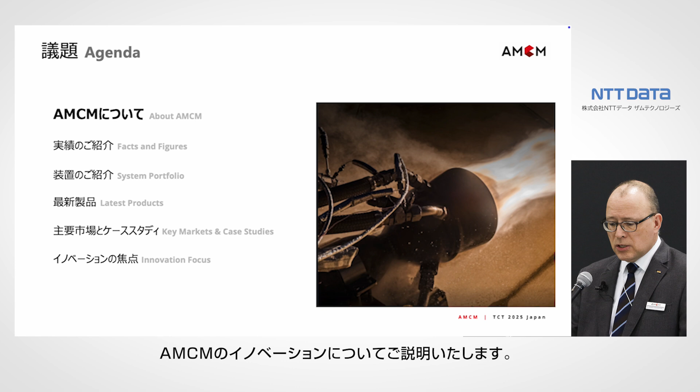So my agenda: I will tell a bit about AMCM, some facts and figures, and about our system portfolio. Most relevant, I think, the latest products. Also our markets and some case studies, which are also on display here at the show, and our innovation focus.

So where we are, AMCM is part of EOS Group. We are an independent sister company, 100% owned by the Langer family.

Our team came from, let's say, different companies. About 50% of the team worked at Rofin-Baasel for many years, so they are laser and scanner specialists and have a background in automation. The other 50% are from EOS, so they have additive DNA, like me. We have some colleagues who also developed at EOS, for example the EOS M400, EOS M100. So we have R&D colleagues in our team with a lot of experience.

How was the history? Maybe I start even earlier. In 2016, there was a trade show and Dr. Hans Langer asked Martin Bullemer, our today's boss, who worked for EOS at that time, when do we make the machines which EOS doesn't produce? Because they're too exotic and don't fit into the series portfolio. Martin said, I have an idea, because he also worked for this laser company and had a network, and founded a startup.

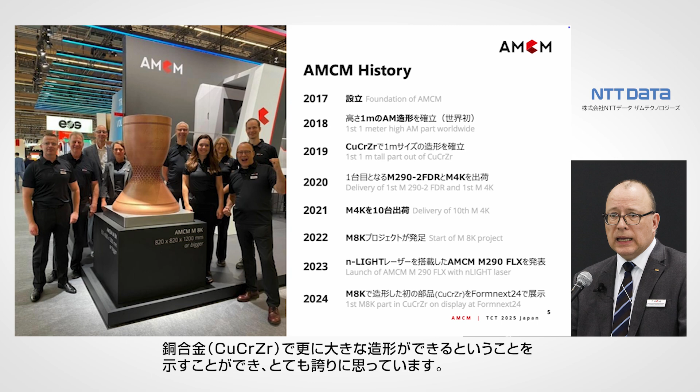And so it was constantly growing. A year later, there were already 10 M4K installed. In 2022, we got funding for an even bigger machine, the M8K. In 2023, we had our first nLIGHT system at start for beam shaping. And last year, 2024, we had the first part on display at Formnext, and we were very proud, the part is over there on our booth, that we could demonstrate that bigger additive manufacturing parts in copper chrome zirconium are also possible.

A bit about facts and figures: meanwhile we have 136 machines installed worldwide. So you see a bit of a split - biggest is North America, but Europe is also quite a good market, and 22 in Asia and 3 in Australia. All these 136 machines would not exist if Hans Langer hadn't given us the chance to make a startup.

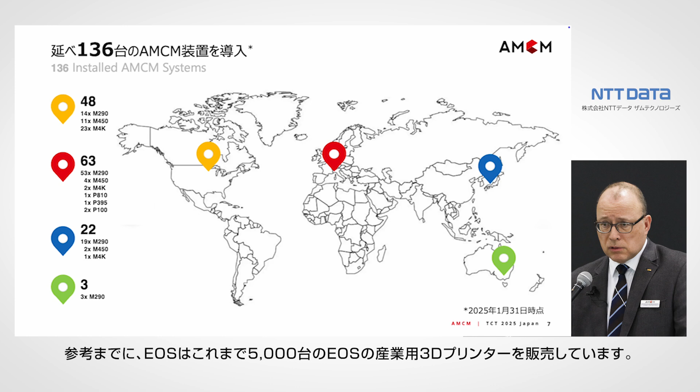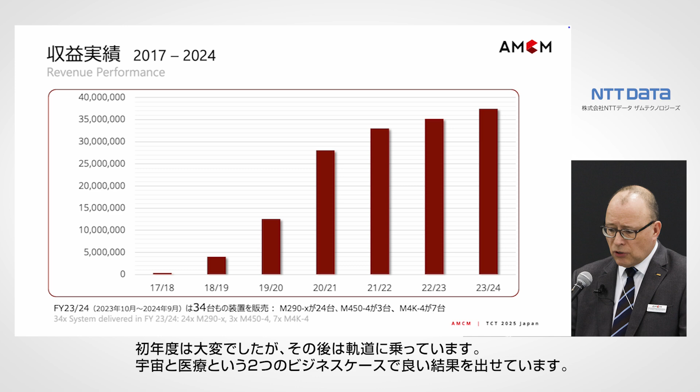Just to have a ratio, EOS has sold 5,000 additive industrial printers so far. The first year was hard, and from that point on we had a good story. So based on these 2 business cases, which were space and medical, we could make good numbers.

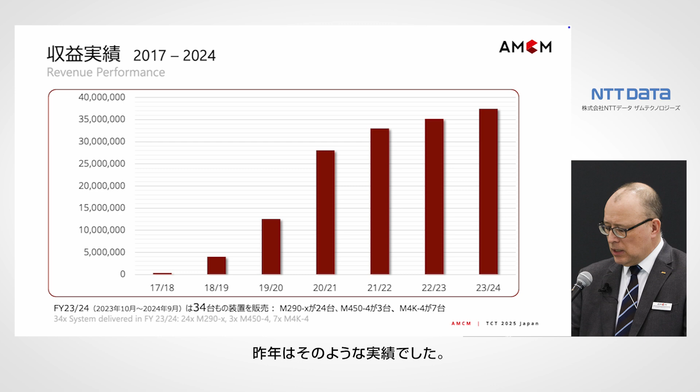Just to give an idea how last year was, in machines we made 34 machine deliveries. These 34 are 24 M290 variants, 3 M450s, and 7 M4K. So that is, let's say, our last fiscal year.

Where we are located, we are in Starnberg, 20 kilometers away from Munich, and close to EOS, maybe 15 kilometers away from the EOS site. We have a 5,000 square meter production site, where we can do production in parallel of, let's say, 12 M290s, 2 M450s, and 4 M4K machines. This is where we have our production slots, machines next to each other.

We produce them in teams, and our number of employees is 89. We are a very technical team, so a lot of engineers for R&D and also for production. We have 7 project managers, an application team, 6 service technicians who install machines worldwide. We also have a software team because customized machines sometimes need adaptation in software, and also logistics, exports, and quality, purchasing, controlling, sales - what every company needs.

But our benefit in this network with EOS is we can also use shared services from EOS. For example, IP or even support from EOS service worldwide can be used, because we are part of this EOS ecosystem.

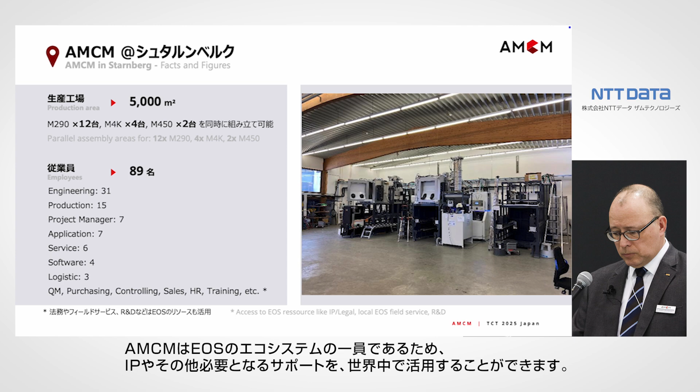We plan to find a new site because, as you might have seen, we have a big part. That big part needs a big machine, and to assemble big machines our site is much too small. So we will move in 2027 to a new site where we are able to place or produce up to 4 M8K machines.

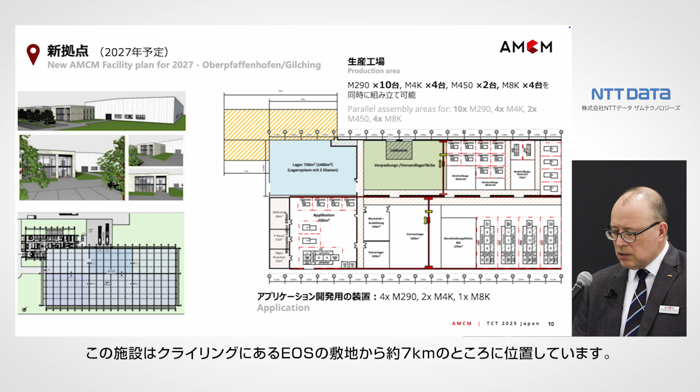This is a production space for M290s, M450s, M4K, and that is our application area. So just caused by that bigger machine, we also have to upgrade a bit our infrastructure, and that facility is about 7 kilometers next to the EOS site in Krailling.

Yeah, then a bit about our portfolio.

Maybe a bit of definition first. In English, tuning and customizing is a bit mixed. What we call tuning on the left-hand side are machines which look more or less like EOS machines. From outside, you don't see a difference. Maybe they have stronger lasers, maybe a bigger envelope. They have a modification we've done to fulfill customer needs.

On the right-hand side, we have machines which at least have a bigger lid, or have a completely different face like the M4K, but inside are still modules from EOS or software from EOS. This is what we call customized. You can see in the numbers it's about a 50-50 split. The left ones are less changed, let's say, and the right ones are more customized.

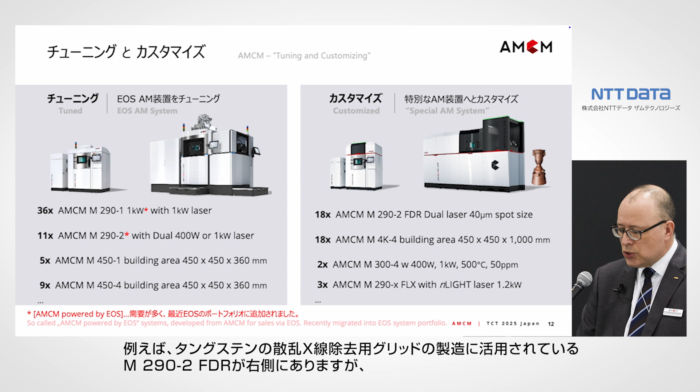The deal with EOS is, as soon as a machine variant, like the M290-1 kilowatt, passes a special threshold, maybe 20 or 30, EOS can decide to take over that machine in their portfolio because it's relevant for them. If it stays exotic, like on the right-hand side this M290-2 FDR for tungsten anti-scatter grid production, then EOS can say this is too exotic, keep it. So it's good for customized machinery, and that is your job.

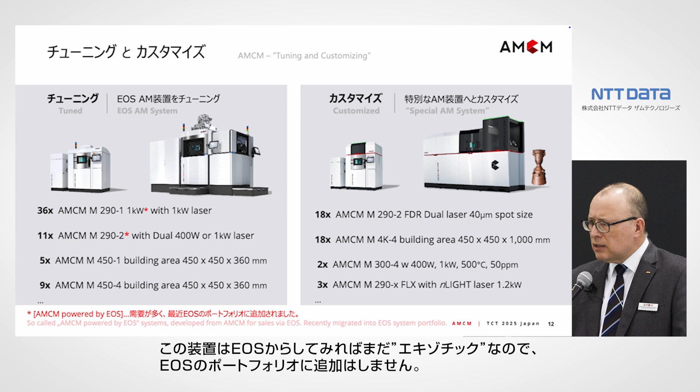What we call small series are machines which we have in a portfolio and sell more often. So it's M290s with 1 laser, -1 means 1 laser, -2 means 2 lasers. These lasers could be 400 watts, kilowatts, or with nLIGHT laser 1.2 kilowatts. Same with M450 and M4K. We can do different variants of laser in that machine, and also other equipment - I'll come to that, like heating or other features.

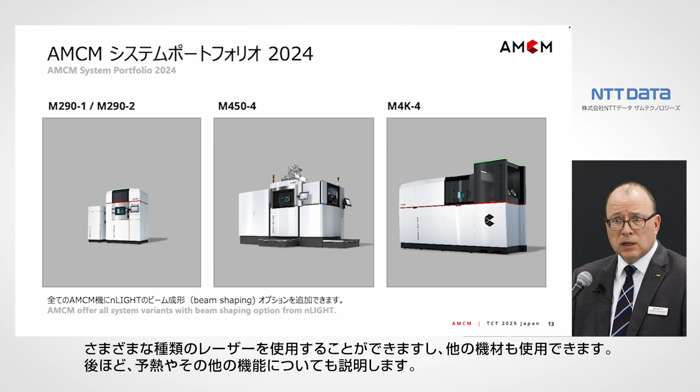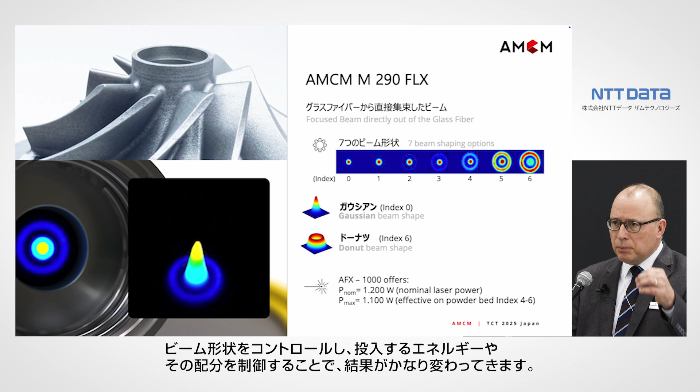A very special feature is the nLIGHT laser with beam shaping. From my point of view, beam shaping with nLIGHT laser offers just one additional parameter, but from my perspective it's the most important parameter. You can control the beam size, you can really control the energy distribution, and that makes the difference.

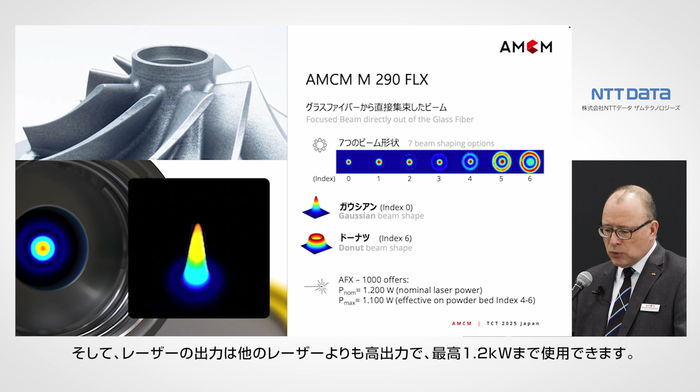You see it here on this animation in a quick way. Inside the laser, the shape is formed, whether it's a Gaussian or a donut form, and then a bit like on a milling machine, you have a finger miller or a big milling device to make fine or big treatment. Same here - you can utilize the laser energy much more efficiently than just having a constant Gauss laser. The laser power is stronger than others we currently use. Even in the best conditions, up to 1200 watts can be used.

So here's a short video. Here we go. Doesn't want to - give me a second.

Now it starts. On the left-hand side you see a standard process with, let's say, 295 watts, and a 400 watt laser. But even for a 400 watt laser, you cannot utilize the full energy because the spot is so fine that it would vaporize too much material.

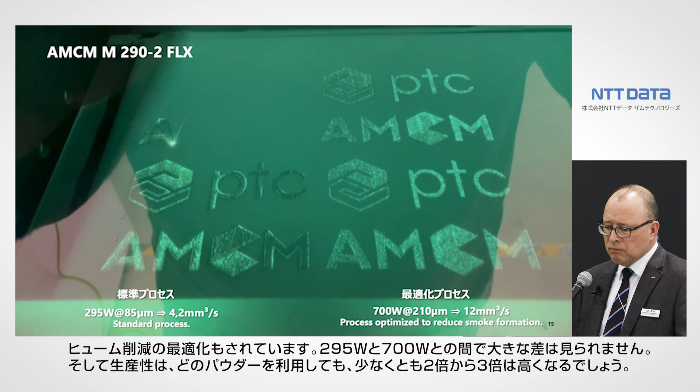On the right-hand side, the energy is much better distributed, and it even has an optimization for smoke reduction, so you can hardly see that. 295 watts compared to 700 watts makes a big difference. The productivity, for more or less every powder, could be at least factor 2, factor 3 higher just with that tool, beam shaping.

And the range is from 85 micron standard on the left to 210 micron in donut size.

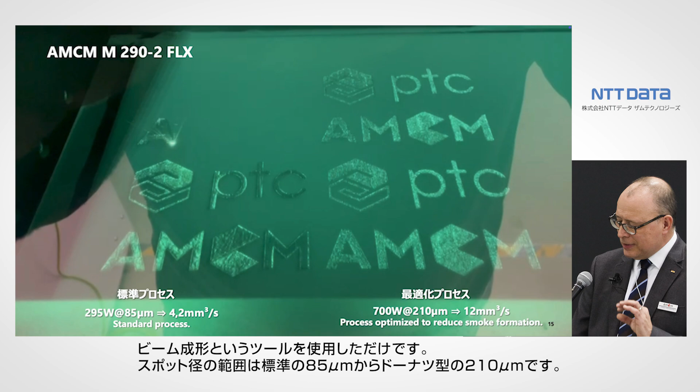Meanwhile, we have 15 systems sold. As I said, we can equip all our machines with nLIGHT laser. First customers start with a single - universities, but also OEMs. We also have a dual in our portfolio with full field overlap. There are already 7 systems sold.

We have a so-called M290 FLX. FLX stands for flexibility, FDR for fine detail resolution. This machine has a very fine spot from 55 to 140 micron, so you can make very fine structures but also thicker ones, both in one machine. Additionally, we have 5 other systems in our R&D or at EOS site.

Last year there was already the first user meeting. Customers, the university, running such machines, sharing their know-how and wanting to push that market because they see a very big potential.

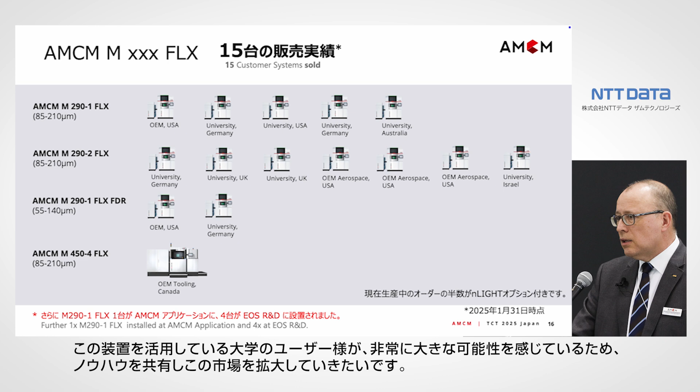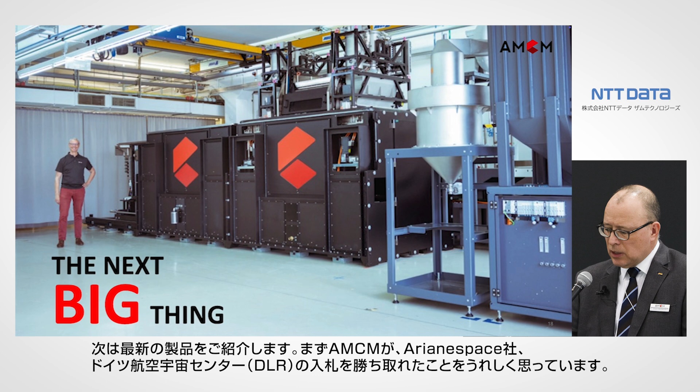So, next about latest products. We are happy that AMCM won a tender, a funding from Arianespace, a German aerospace and space agency, DLR, and they gave us money to make an XXL AM system because the European Union wants to be independent in capabilities, bringing satellites into space or having navigation satellites, telecommunication and defense with our own resources.

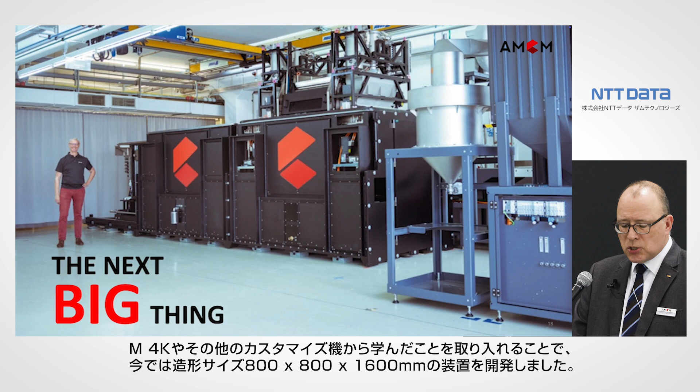This machine, what you see here, is a prototype. It looks a bit different than the design we have on display, but it has the same hardware inside. It's a large size machine. Out of our learning from M4K and other customized machines, we added these and made a machine which now has a size of...

1,600 millimeter part, so the platform is a bit bigger. The footprint is already in the range of 14 by 5.2 meters and 4.5 meters high. If somebody wants a machine with a 2 meter Z-axis, it might be a bit higher, but this is what we do as a customized machine.

The machine is equipped with 8 lasers. We can do kilowatt - the current machine has 8 times kilowatt on board - but we can also make 8 times nLIGHT with beam shaping, as I showed.

Availability is planned for mid of next year, Q3 2026. Benchmarking can start right now.

We are quite busy with our customer, like Arianespace. They booked more or less the next 6 months of the machine. So we expect that in 2025 we run only copper chrome zirconium on that machine, and in 2026 we will change to Inconel 718.

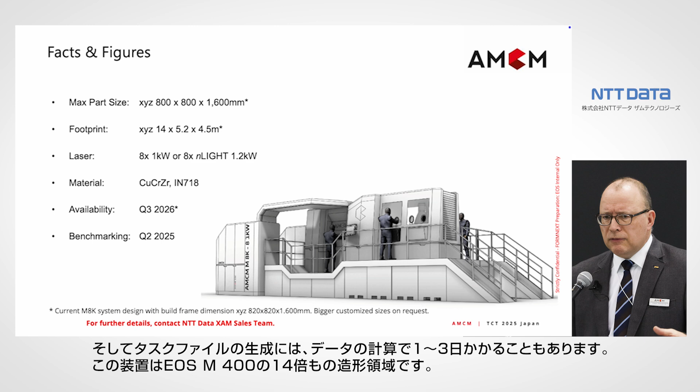Just to give an idea, for the first filling of such a machine you need 5 to 6 tons of powder. And generating the task file could also last 1 to 3 days just to calculate this big amount of data. And just a number, it's 14 times the envelope of an EOS M400, what you have in that machine.

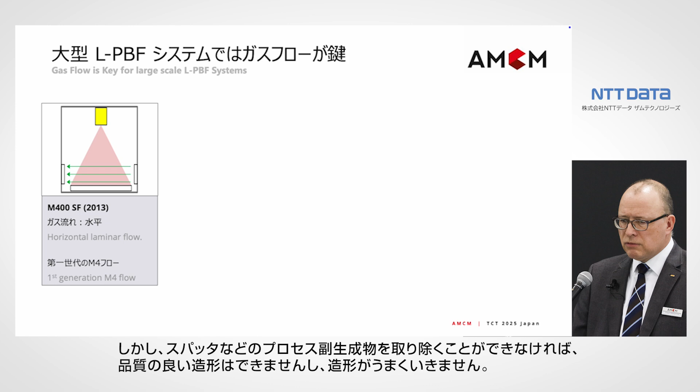Yes, there we come from EOS M400. This is, let's say, the most relevant topic to make bigger machines. You have to get the flow under control. So it's easy to plug a lot of lasers and scanners on a machine and make a big envelope, but if you cannot remove the process by-products like soot and spatter away, then you won't get a good part, and never a process to build a part.

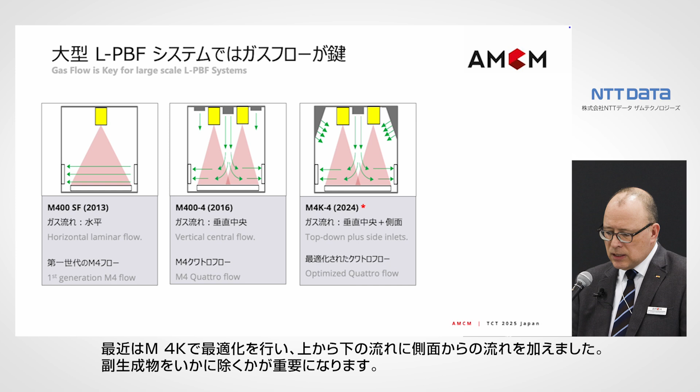So we learned over the years. First it was a kind of laminar flow, right to left. Then it was top down, like a shower, on M400-4. Recently we optimized on M4K, top down and side, because it's all about removing the dirt. If you make taller parts, like a 1 meter part, you have to remove the dust more efficiently to avoid that during a long job, dust is blocking the protection glass.

And for an M8K with 8 lasers and even 1.6 meters, you have to make sure that there is no effect, no pollution on the optic.

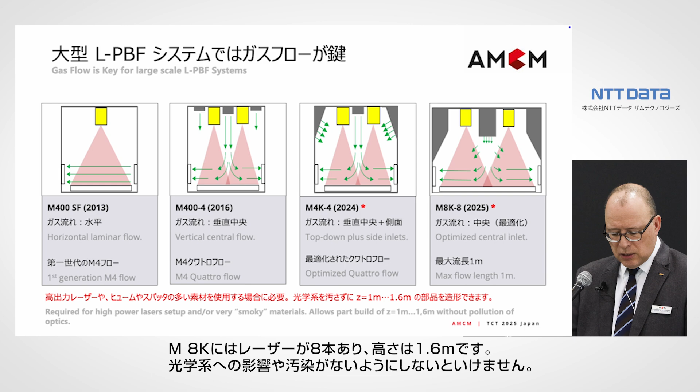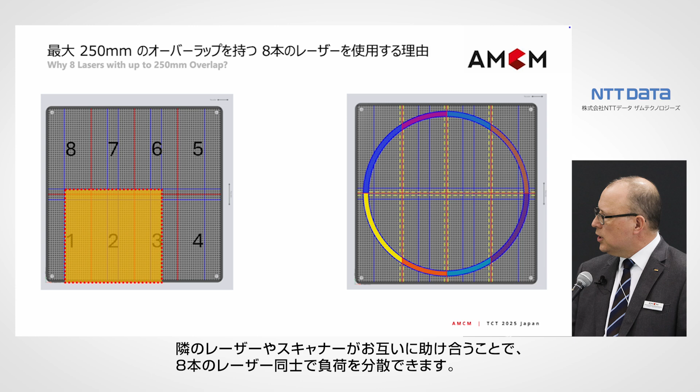Next is our thoughts about scan fields. As I said, you can plug a lot of lasers on such a machine. We decided just to do 8 lasers, powerful lasers with big scan fields, so 450 to 425. The idea is there we can do a better load balancing. So neighbor lasers, neighbor scanners can support each other and you can split the load to these 8 lasers. There is never a laser lazy.

They all work, and even scan fields which are not neighbors, like here number 2 and number 4, have an overlap. So we made a lot of calculations and saw that whether it's a cylindric part, rectangular, asymmetric, or many parts, this has big benefit.

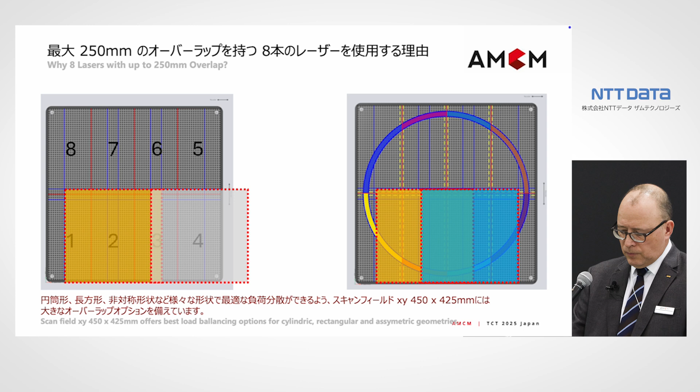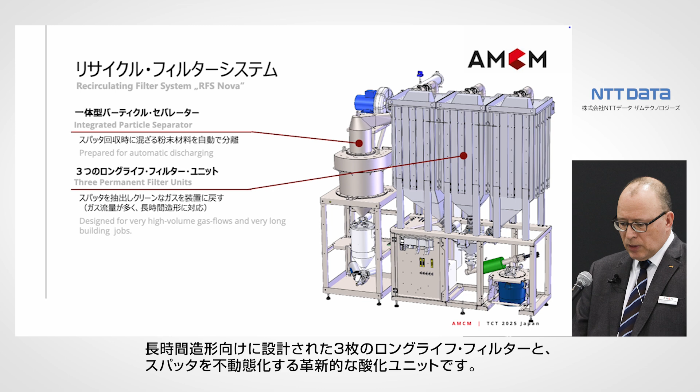Then, having a big machine, you also have to think about the filter system, because we want to recycle our process gas and get rid of the soot and condensate in the process. So we made a big filter system with particle separator. We have 3 permanent filters designed for very long jobs, and also an innovative oxidation unit which makes a passivation of that condensate during process, so you do not need any chalk, sand, or silicone to passivate the powder.

It is oxidized during that process, so it's de-risking for the operator handling the waste, and it's also reducing cost because you don't need this additive to passivate it.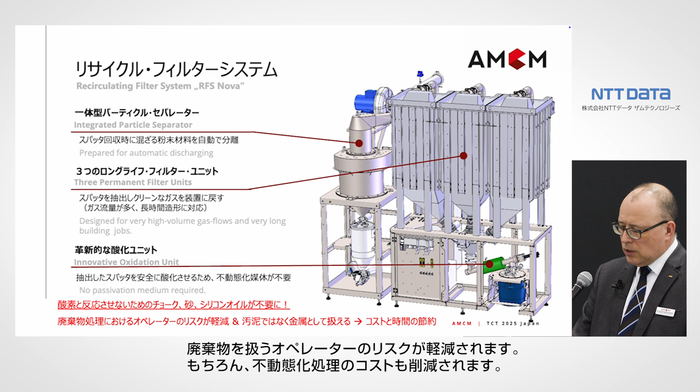Next, if you run a lot of scanners and lasers, you need a lot of cooling. You have to control that setup, and you have to make a thermal decoupling of that optical element, optic bench, with the process chamber, with the X-frame, the frame underneath. So there is a special design to avoid that it heats up. And we also have a lot of sensors in the machine to keep the process conditions constant.

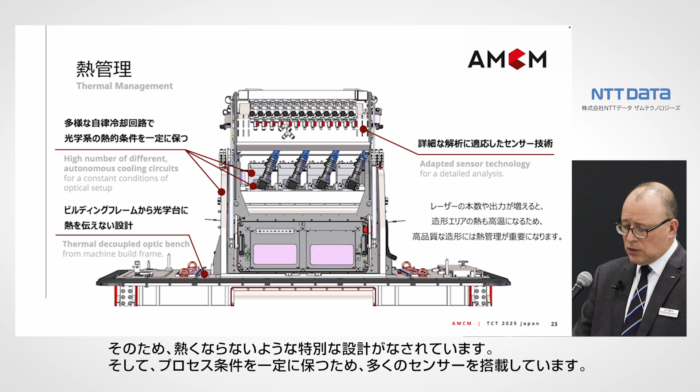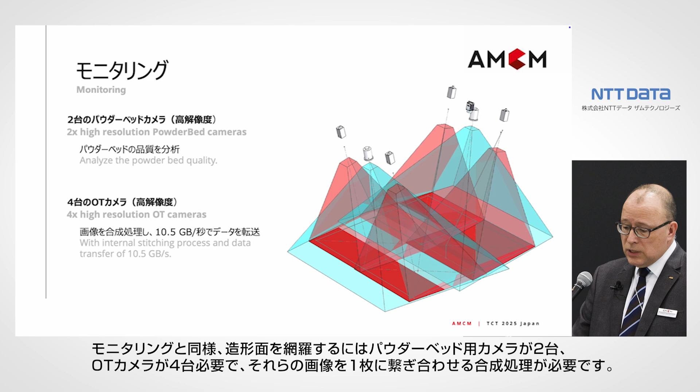As well as monitoring, we have 2 powder bed cameras in there to cover the envelope, and we need 4 OT cameras and need to stitch these 4 pictures into one. And for closed loop, we have to handle 10.5 gigabytes per second just to make the monitoring work.

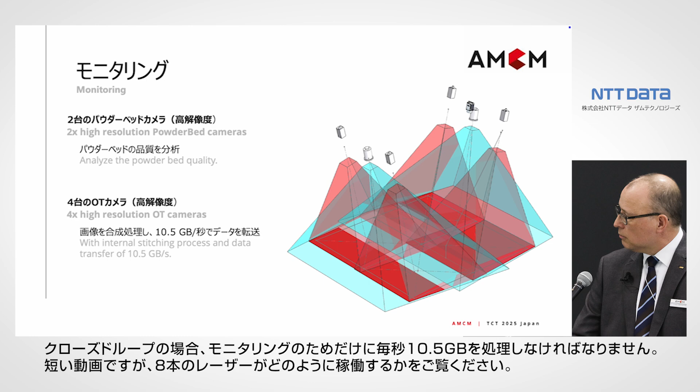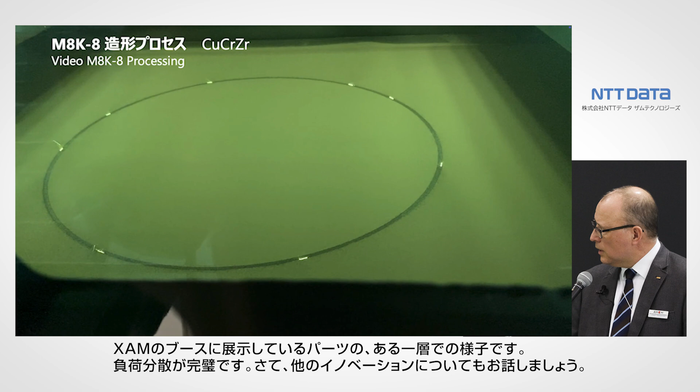Also here's a short movie of how the 8 lasers are dancing. So that is one layer of the part, what you see on display at EOS's booth. So that is perfect load balancing.

Then I come to the other innovation, which is a new M290 with dual nLIGHT. I would say the most powerful M290 version so far. It has 2.4 kilowatt laser power. It has the benefit that it can take existing EOS parameters and use them, because in mode 0 it has an 85 micron spot.

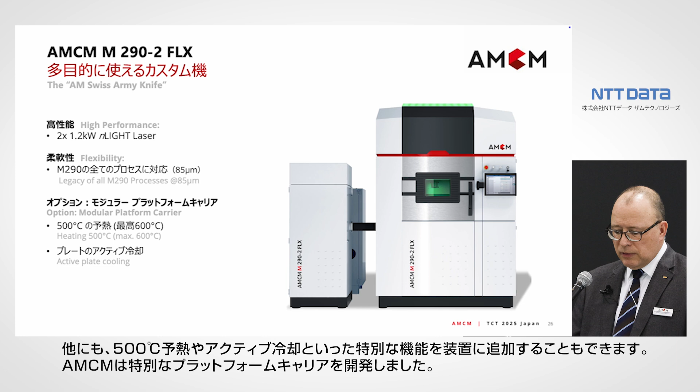And the machine can also be equipped with special features like heating up to 500 degrees or active cooling. I'll come to that.

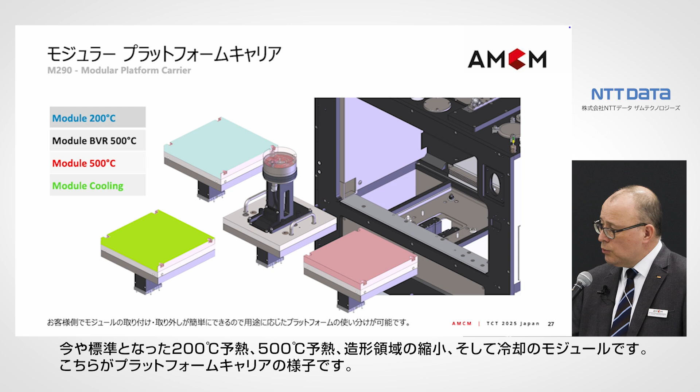So we have developed special platform carriers with 200 degrees, which is standard already now, 500 degree build volume reduction, and also cooling. So that is how a platform carrier looks like in a machine.

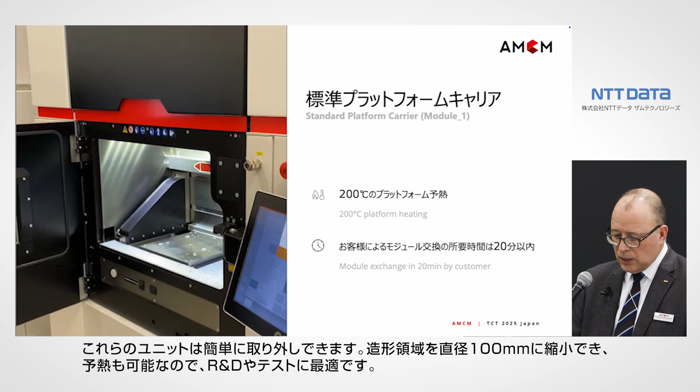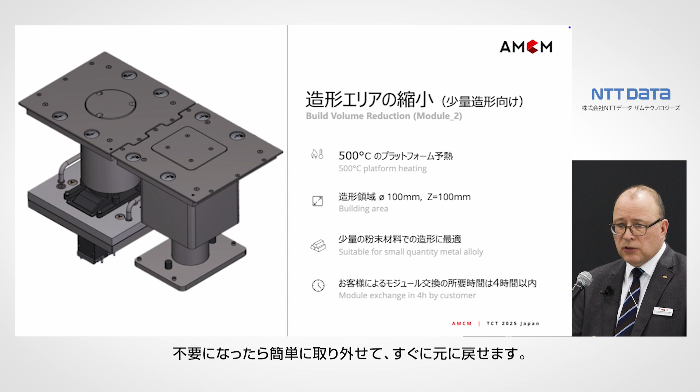And you can replace this unit quickly via the operator, maybe in a kind of minimizer. Smaller envelope, 100 millimeter diameter, heating, suitable for R&D, for testing. And you can change this device if you don't need it any longer, then you use the big area again. So this is the area where you can expose and make your tests.

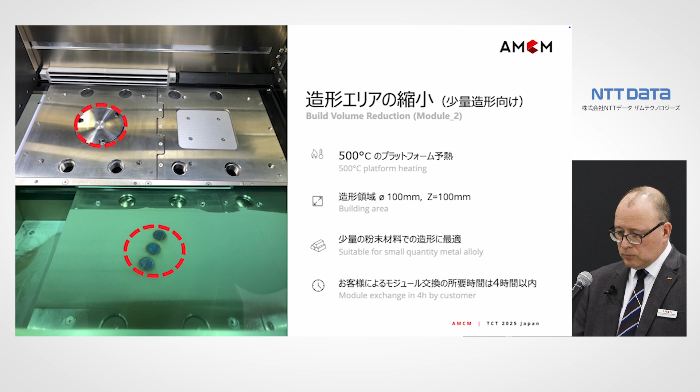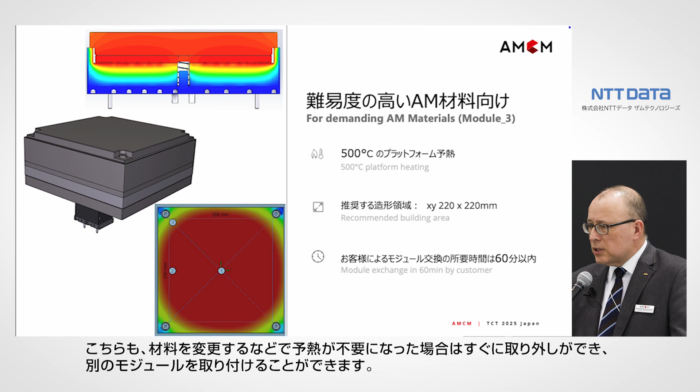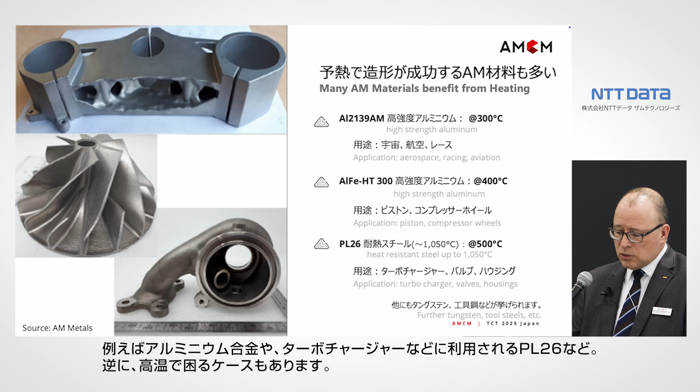We also made a platform heating because there was demand from some customers, up to 500 degrees. You see in the corner it's a bit colder, so we recommend a build area of 220. If it's not needed because you run a different material, you can take it out and put in a different device. Some alloys from EOS and others have been tested, and we've seen they benefit from these higher temperatures, for example aluminium alloys or PL26, used for turbochargers and heat-resistant material.

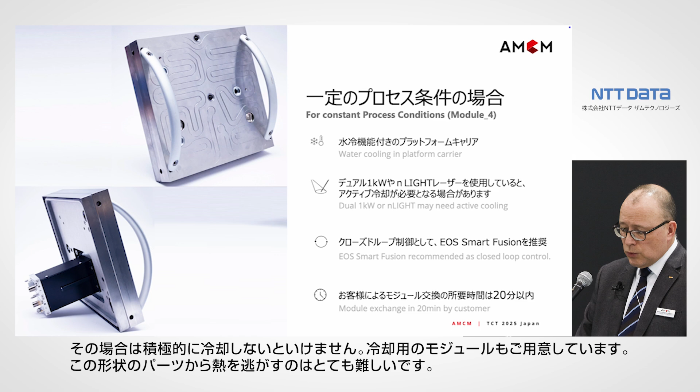But it could also be the other way around, where the process gets too hot because we have more and more laser power and the parts have good heat conductivity, so we need to cool it actively. So we also have an insert with cooling. With a part like this tree form, it's very difficult to get the heat out of the part.

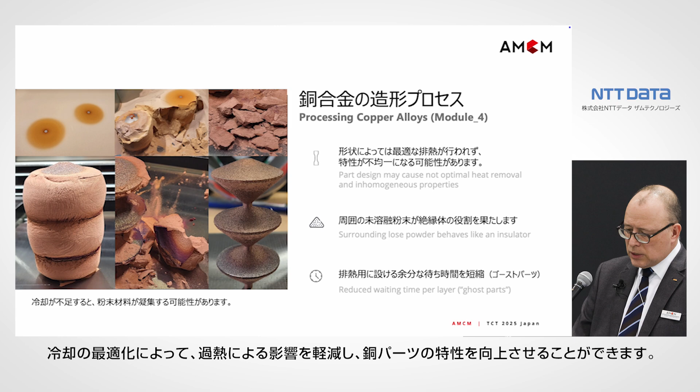So what might happen when you produce copper? You see a lot of copper parts here at the show. It looks easy, but copper can make trouble. At the top end you have these dots on the powder bed. When you remove the powder, you see agglomerations, and the powder becomes quite agglomerated and sticky. So here, defined cooling and also some closed-loop monitoring can help reduce that effect and give better properties in your copper parts.

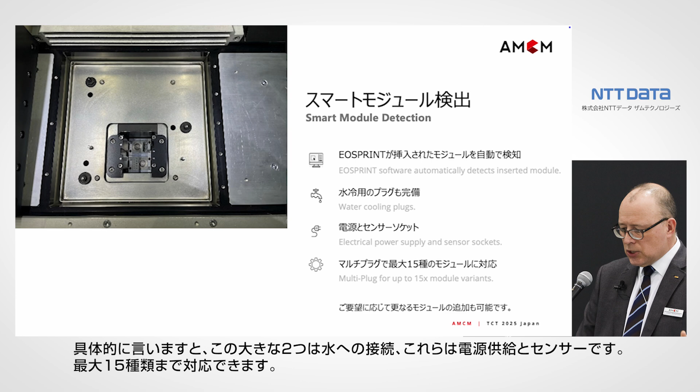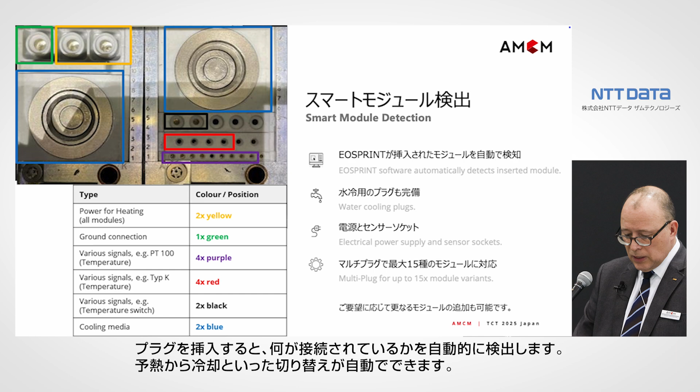How does it look like? In your machine, you have a socket where you plug in these carriers, ready to take the water connections, the power supply, and even sensors. In detail, these two big ones are for the water, this is power supply, and this is sensors. We can do up to 15 variants, and if you plug it in, it automatically detects what device is active, so you can switch from heating to cooling more or less fully automatically.

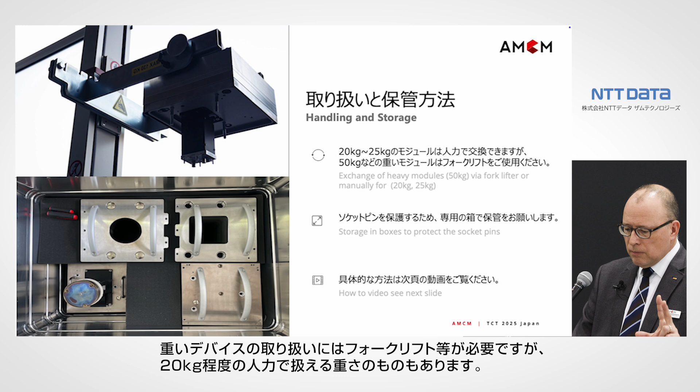Some of the devices are a bit heavier, so you need a crane to take them out, but two of them can also be lifted by humans directly, since they're just 20 kilograms.

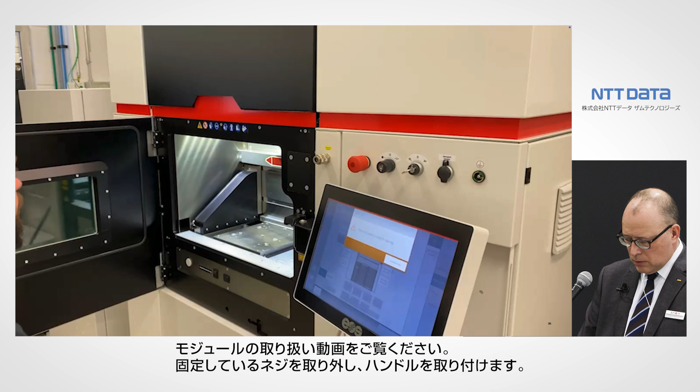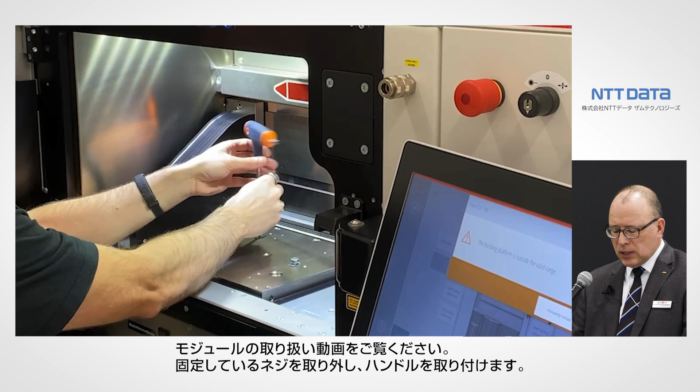I'll jump over the video quickly. So you open 4-6 screws which lock them in the machine, then you add handles, and then take the handles and take it out. So that's a simple way.

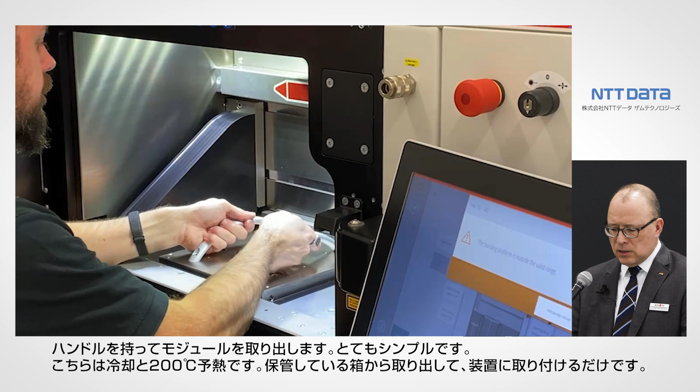This is the cooling and the 200 degrees version. So you can take it out, store it in your box, and put in the next one.

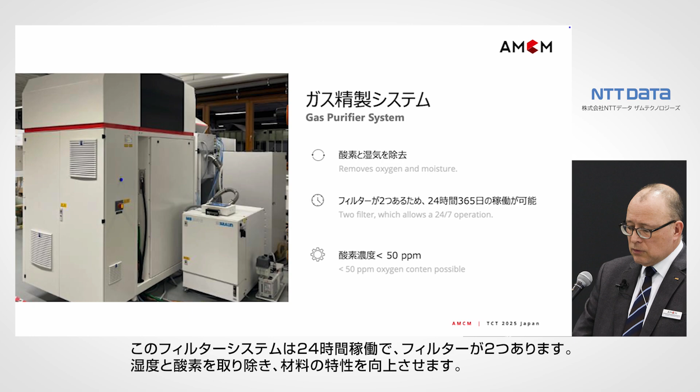Also relevant if you use heating is to have a very low concentration of oxygen, since higher temperature makes your process more sensitive to picking up oxygen. That filter system has a 24/7 option with 2 filters, and it can remove humidity as well as oxygen, giving you better properties for demanding materials.

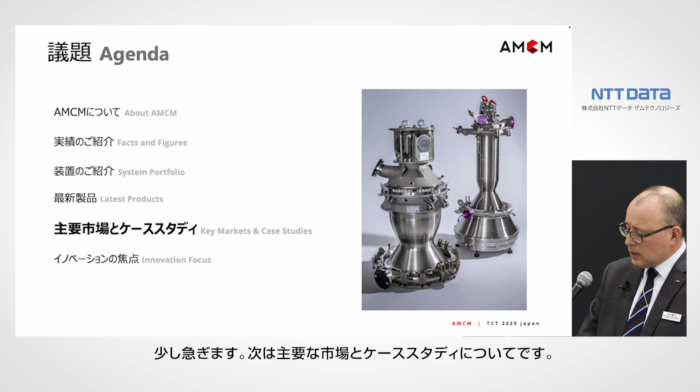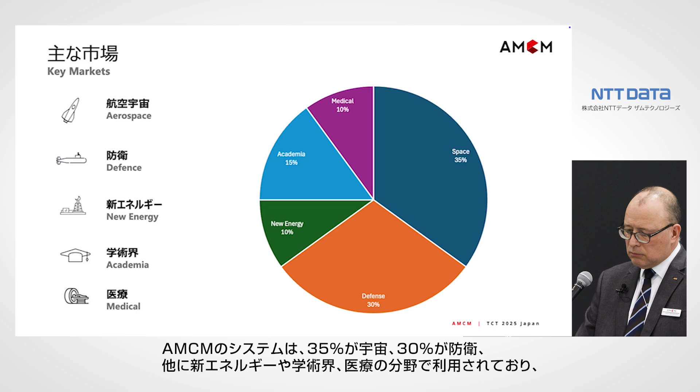I'll speed up a bit. Next is key markets and case studies. Our AMCM systems are split roughly 35% space, 30% defense, new energy, academia, and medical. That's about the split today. Mostly it's combustion chambers in different sizes, M8, M4, M2, but also conventional aeronautic hydraulic blocks for Liebherr.

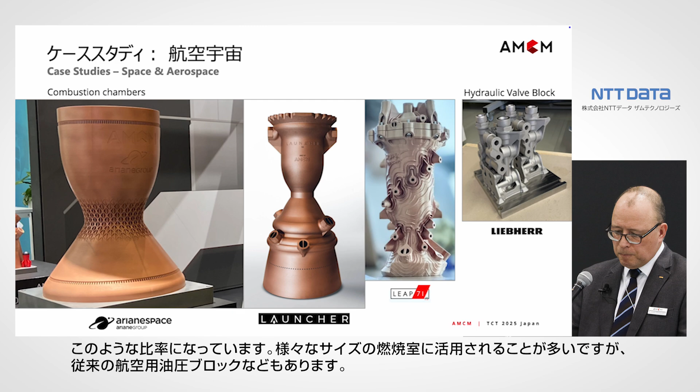And that part here is a simplified version of an Ariane combustion chamber. Ariane has two different devices, the Vinci and the Vulcain, for stage 1 and stage 2, and the idea is to make these additively.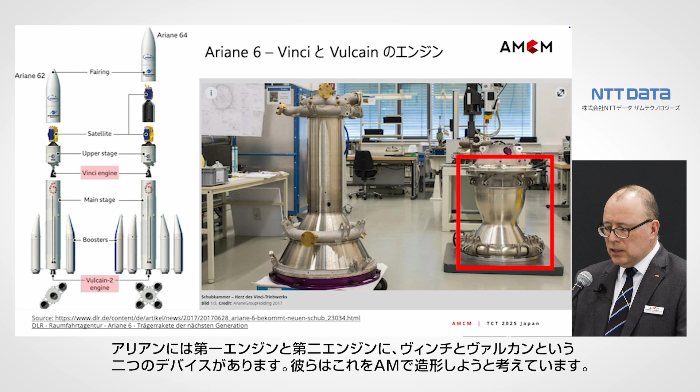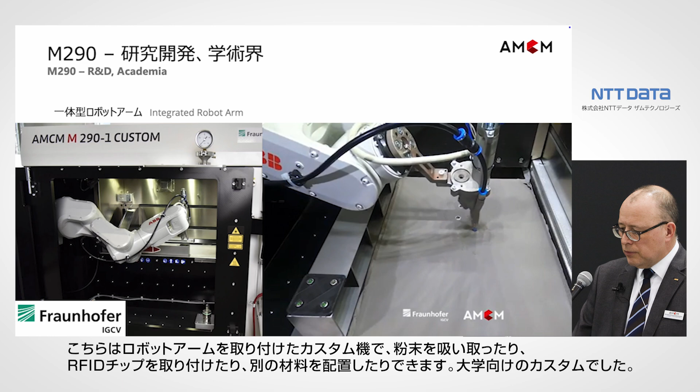We also make custom machines, very exotic ones. Here's a machine where we integrated a robot arm to suck away powder, place some RFID chips, or place other powder. That was for a university. We've also made a machine with a CO2 laser producing pills, a pharmaceutical special application.

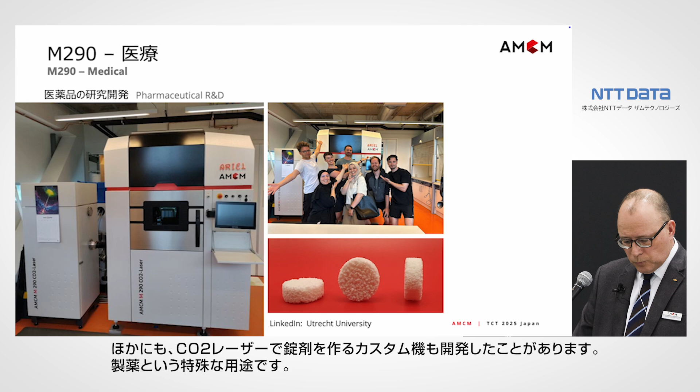Maybe roadmap is a bit misleading. What can we do next? Because it's all based on orders, so if there's no order, we don't produce a machine.

We can do machines with this plug-in I explained. We can do M450s with 6 lasers, and we already have orders for that, and M4K with 6 lasers, whether it's kilowatt or nLIGHT. In 2026, we will deliver the first M8K, and the concept for that big machine is also ready to make up to 1 meter machines, so even 12 lasers would be possible. The journey goes on.

Also, the beam shaping nLIGHT laser called AFX is already available with 2 kilowatts now, and I think they will grow in laser power. So that's the capability.

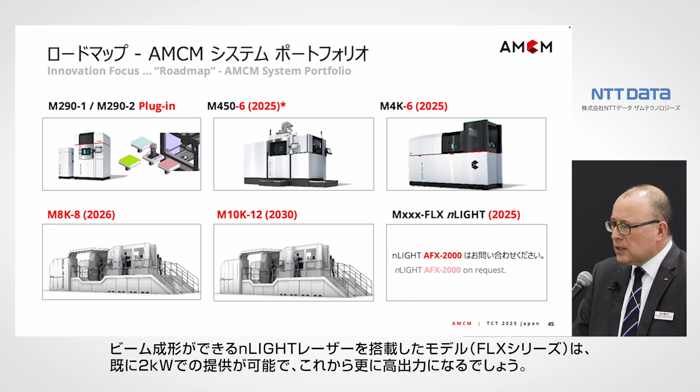We are a tuning company, so we boost your application. If you have a need, let us know, whether it's a bigger machine, a more powerful machine, a machine with heating or gas purification. There we can also use the ecosystem of EOS - we get process development, software development, and they help us integrate, for example, Smart Fusion in our system, which was developed there. So we can take the benefits from that network and make unique systems.

And the business model is we don't have machines in stock. We have to have a PO first.